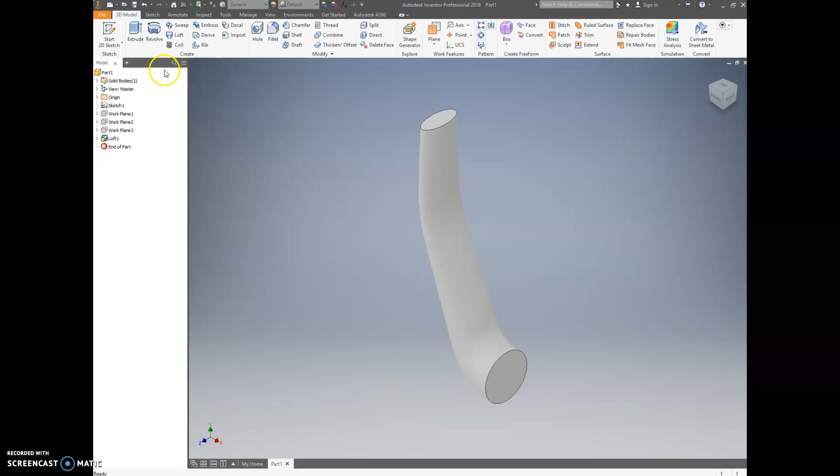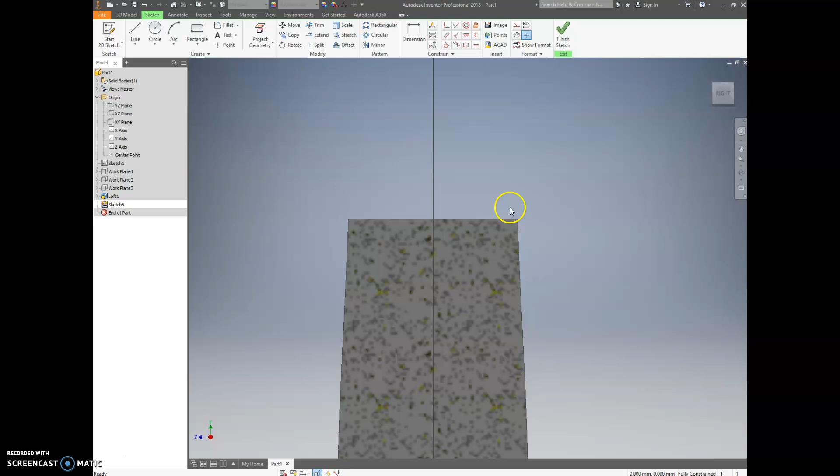I can place a sketch on the YZ plane. Let's slice graphics to remove the part of the loft that was blocking my view, so I can now see my sketch plane. Let's start by putting just a couple circles here, not too worried about their size because we'll constrain them to get them to fit.

The inside diameter is 10, and the outside diameter is 20.

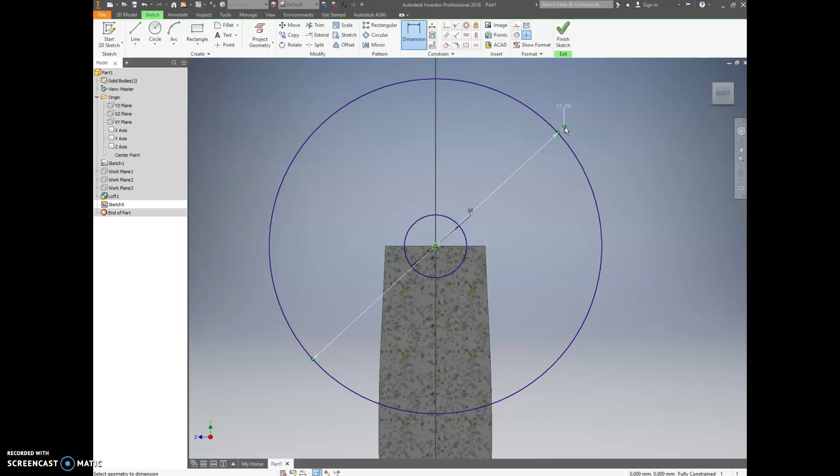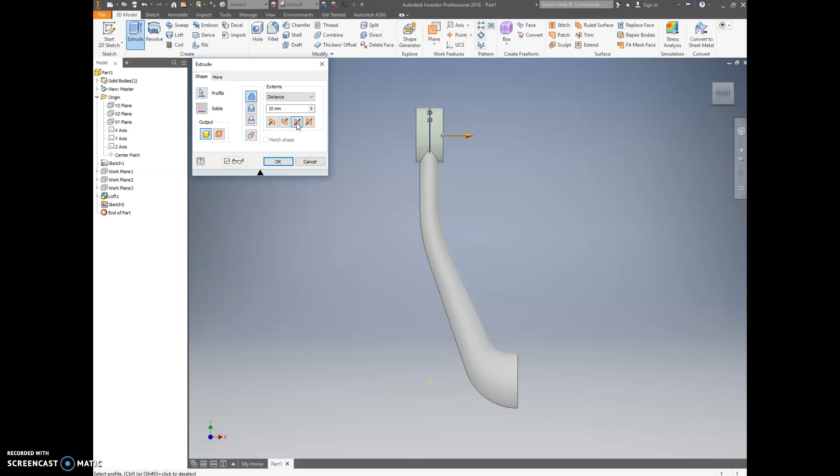I'll finish that sketch and do an extrusion. Select my profile. I don't want it to extrude all in just one direction though. I want it to go out in both directions equally. So I want a symmetric mid-plane extrusion, and the total width of that is 9 millimeters. So there's the round end.

So part of my lever handle is kind of where it shouldn't be. So I suppose I should probably get rid of that with another sketch I'll put right here.

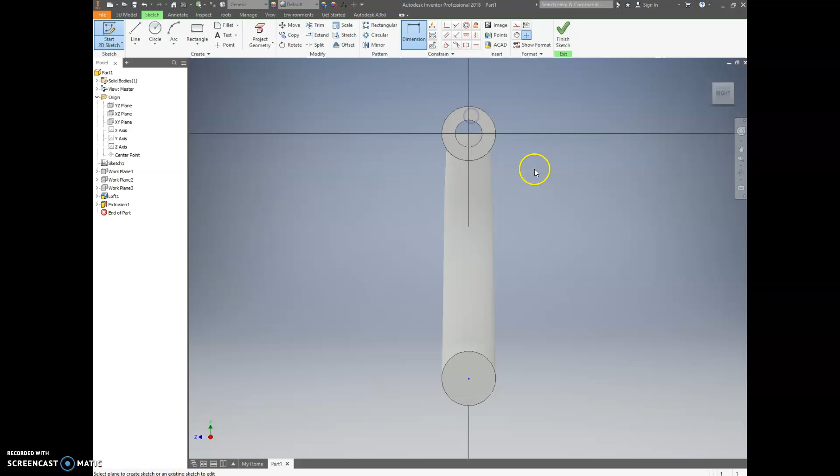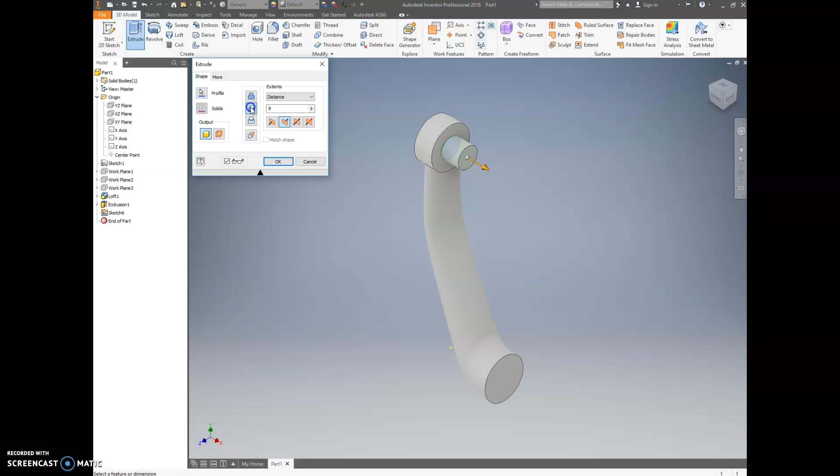All I need to do is project the geometry like that. Projected geometry is already fully constrained, so I don't need to do anything other than finishing the sketch, creating my extrusion, except I don't want to add new material. I want to cut away old material, and I want it to go all the way through the part. So I'll click that, and now that part of the loft has been removed from the center of that cylinder.

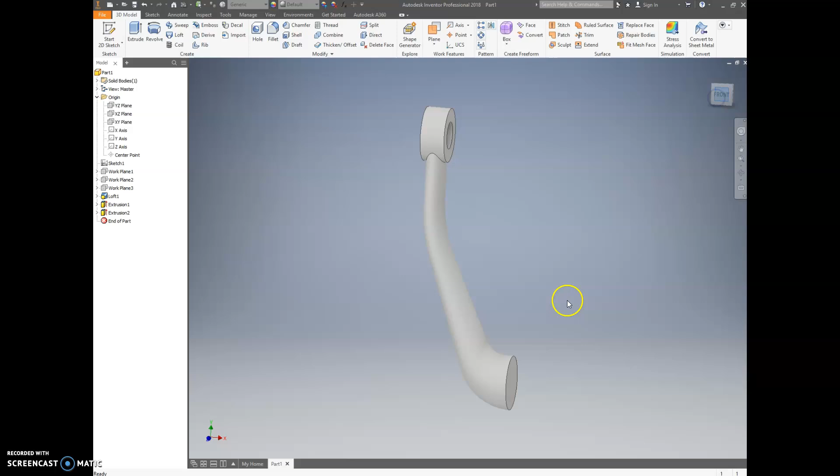Next, I'll add the cylinder down here, which could be done as a series of 4 extrusions, but I prefer to do it all in one step by doing a revolve.

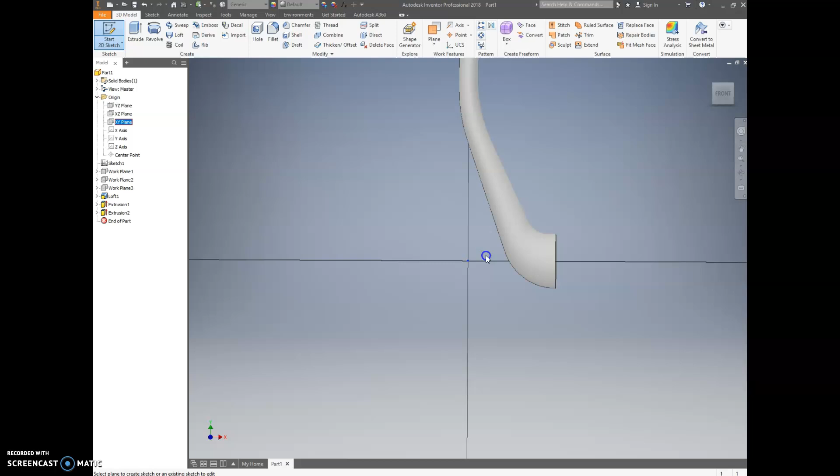So I will place my sketch, my 2D sketch, on the XY plane. Again, slice graphics, or you can hit the F7 key to slice these graphics. And I want to draw this part down here. All I have to do is draw the top half of it, and then I will revolve it.

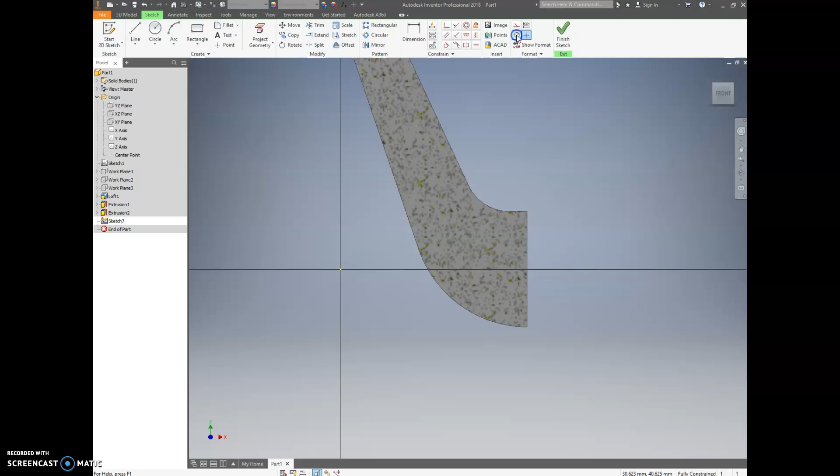So I'm going to change my line type to a center line and draw a line from the origin off to the right here, some arbitrary amount. Doesn't really matter. Turn that center line feature off to go back to drawing regular lines and start sketching.

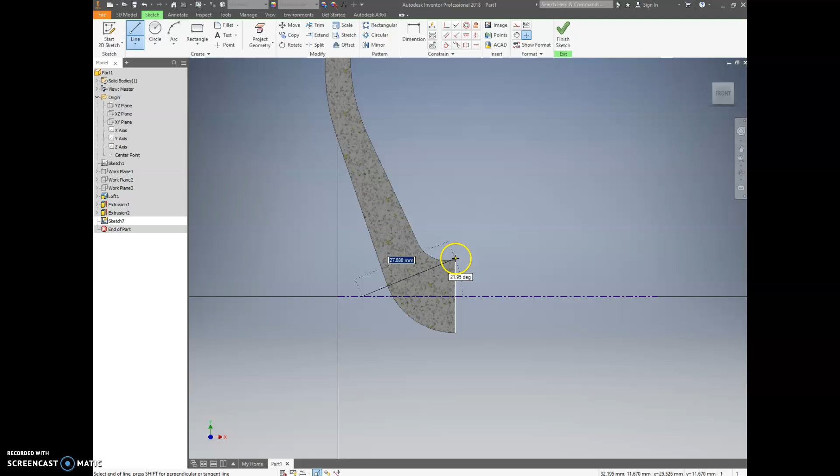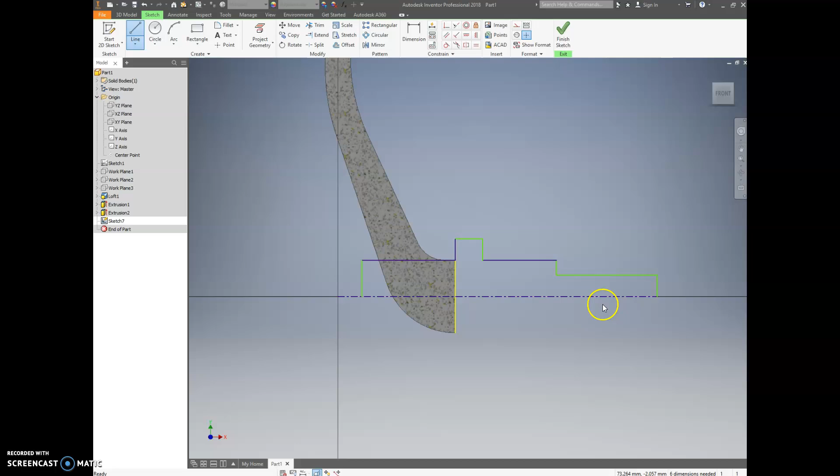Again, don't worry about the exact size of this stuff. Some of it we can, well, it's not going to let me infer that, so I'll just draw this over, up, over, down, over, down, over, down, like that. Not worried right now about the size. I'll come back and add these sizes.

I'll just start at the left and work my way over to the right. The cylinder over here has a diameter of 14. Because I used a center line here rather than just a regular line, when I put a dimension to that center line, it automatically gives me an inferred constraint there that I don't want.

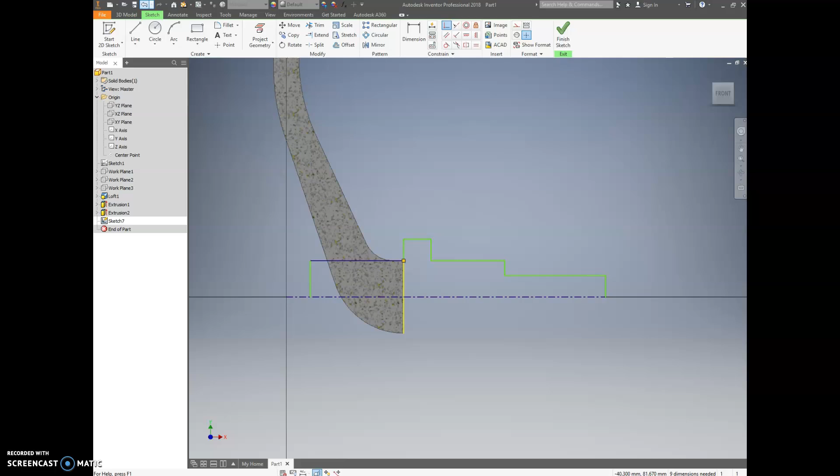Sometimes that happens, so I'll delete that line and draw it again, this time without inferring any constraints. Let's trim that off there and make coincident the end of this line, the end of that line. Nope, I moved it the wrong way. Might have to delete that line as well.

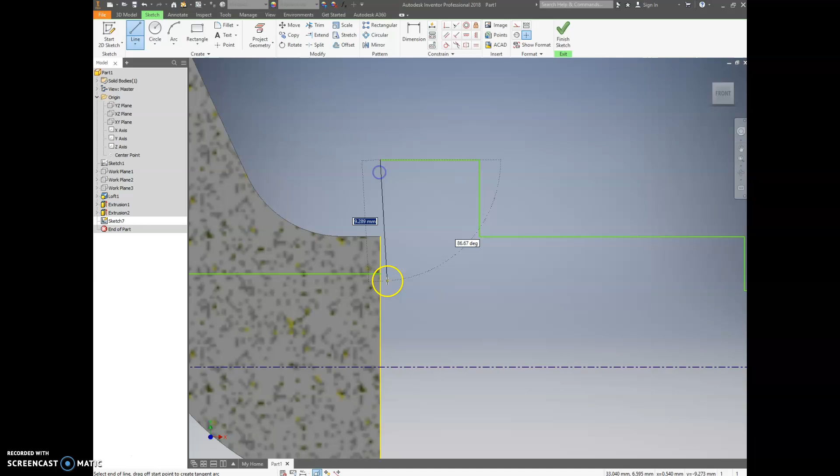So an inferred constraint is, like if I were to start drawing my line right here, that little dotted line that shows up as I place it is in line with this axis. If I click right now, Inventor is going to assume that I want that constrained to that line. Oftentimes inferred constraints are beneficial, but sometimes we accidentally include them when we don't really want to.

So now I can place a dimension here and change that to be 14, and that is what I want. So I've got a 14 millimeter diameter here, and then that transitions to a 28 millimeter diameter for this feature. I guess I'll just leave the dimension over here, 28. Then it steps back down to an 18 millimeter diameter.

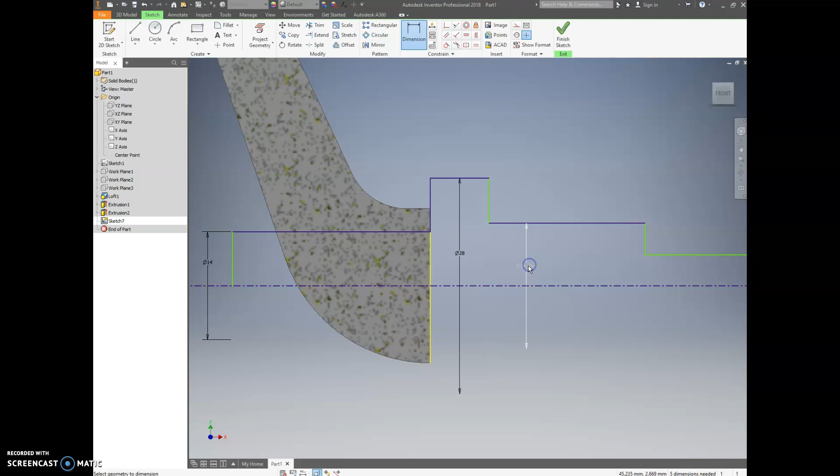And then finally the last step down is a 12 millimeter diameter. Okay, so I've got my diameters. Now we need to look at the lengths of these. From here to here it is 22. This feature has a width of 7. The next step down has a length of 28. And the last one, 24.

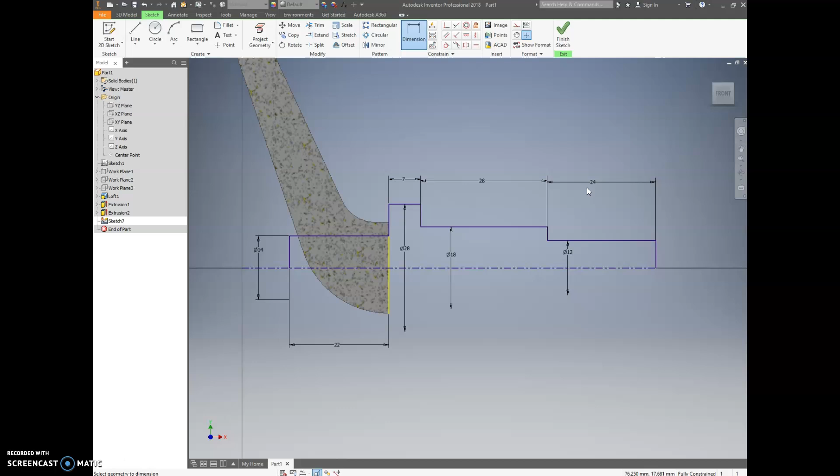Okay, so I've got a fully constrained sketch, which I can now use to make a revolve. So I will revolve. It automatically chooses the profile for me and the axis, and it's a full revolve. I just have to hit OK. So that lays down the basic shape of it.

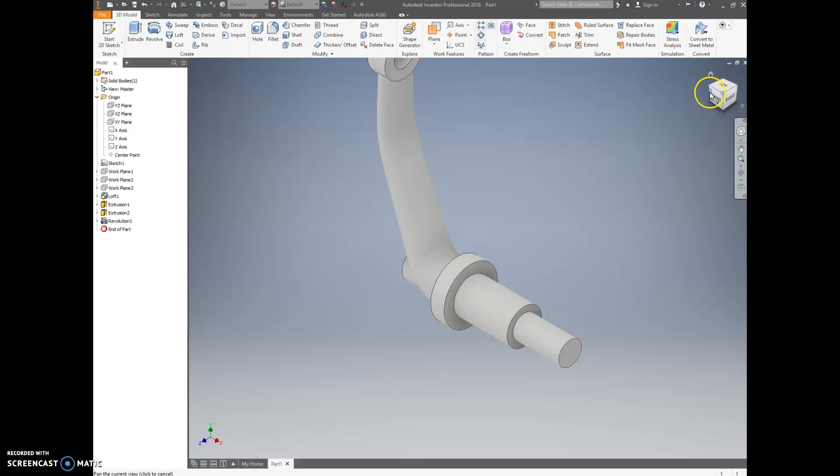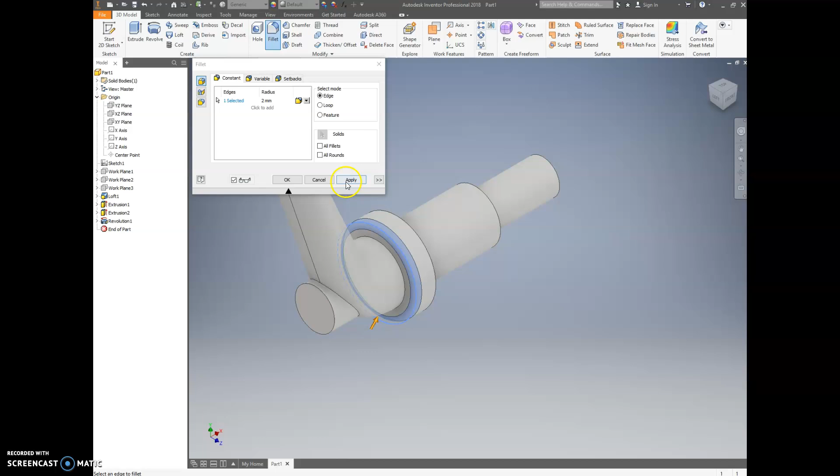Now, there is supposed to be a fillet on this side with a radius of 2, but I didn't need to create that in my sketch. I can make that as a 3D feature. I can select the 3D fillet command with a radius of 2, that happens to be the default. I just need to select the edge and apply it. Okay, so that rounds off that corner.

I also have a couple chamfers here, what size are those chamfers? It looks like they are 1 millimeter by 45 degrees. Let me show you what I'm looking at here. 1 by 45, 1 by 45. So those go on these two edges.

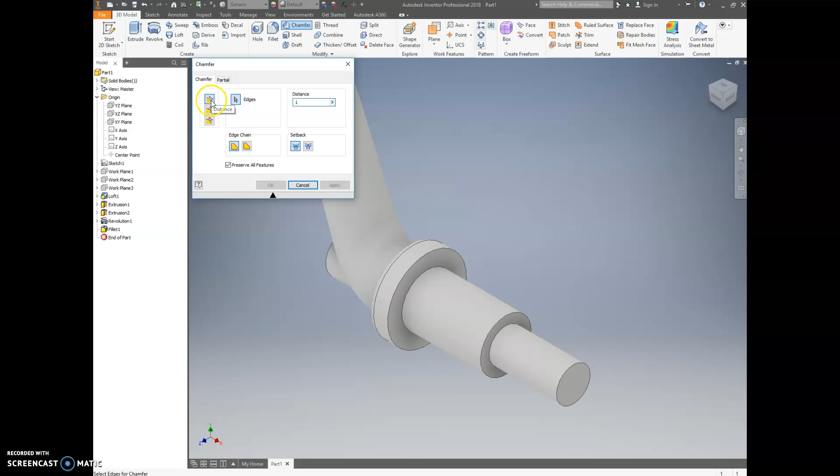So I'll select chamfer, just make it 1 millimeter. The first option here are equal legs, which translates into a 45-degree chamfer. I just need to choose my two edges and apply it. So now I've got the two chamfers.

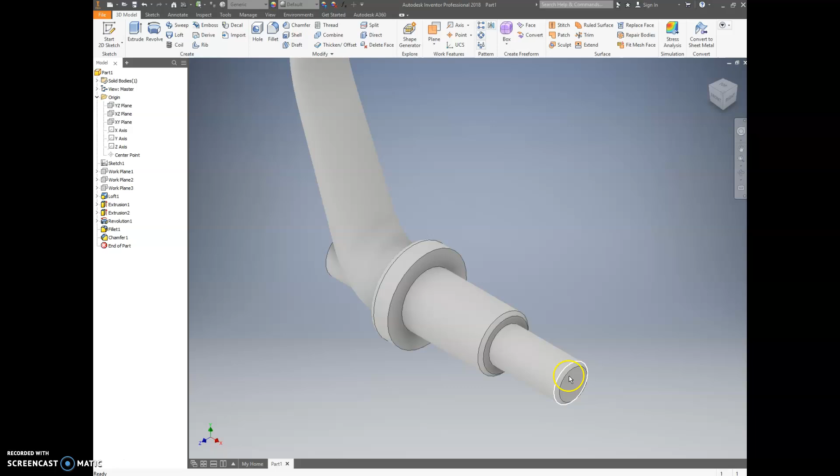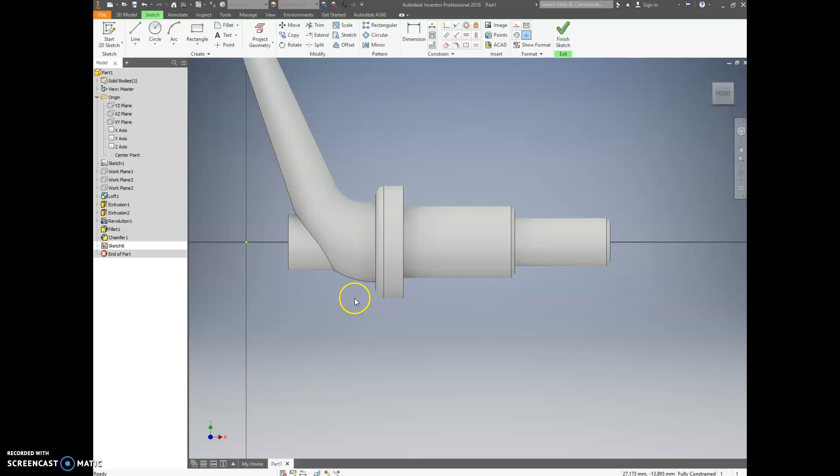There is a hole in the side of this that looks like it's a through hole. So since it goes all the way through, I can just place the sketch on the XY plane. Now, if this hole had any kind of special features like threads, a countersink, or a counterbore, I would want to place this as an actual hole. But since it's just a plain through hole, it's okay to just make it as a cut extruded circle.

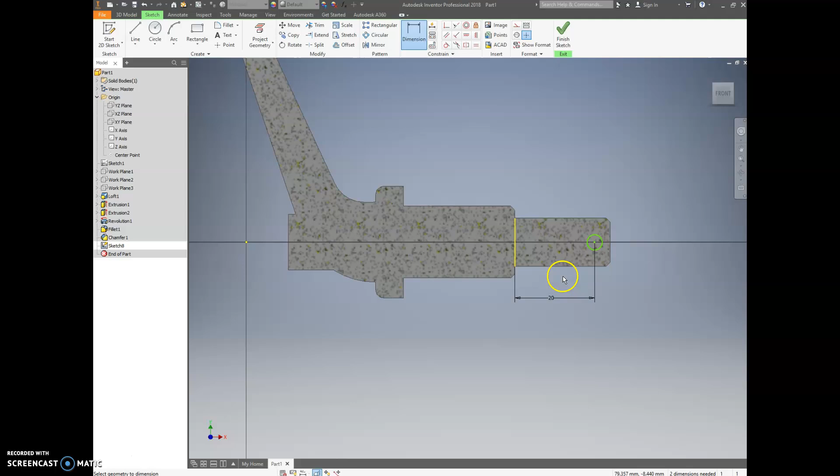The distance from this edge to the center of the hole is 20. And the diameter of the hole is 3. I can make a horizontal constraint between that point and the origin. That fully constrains it. Then I can do a cut extrude.

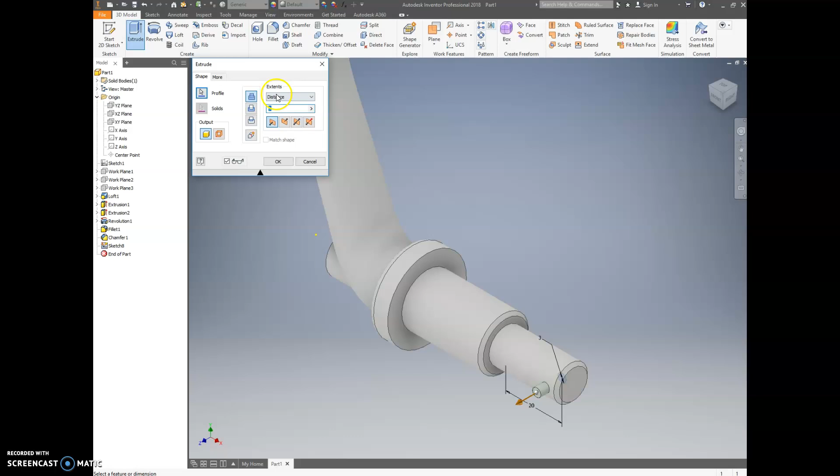Okay, it automatically chose my hole for me, but it's only making it cut extrude in one way. I want it to go both ways, and the distance is just all the way through. There we go, I've got that hole.

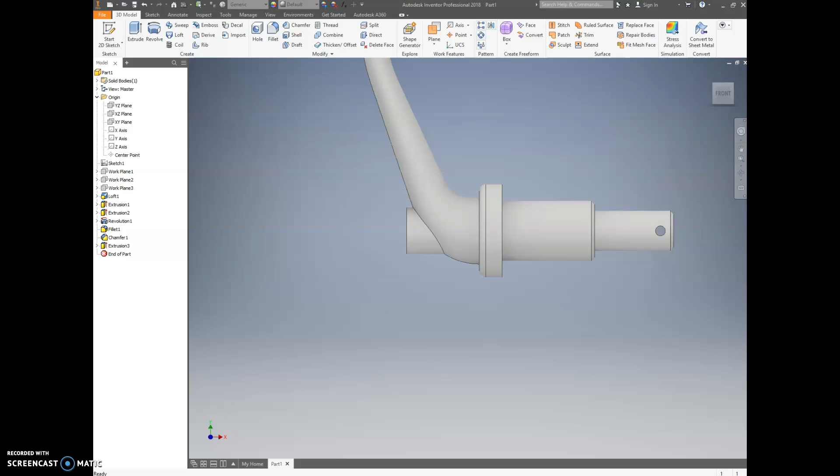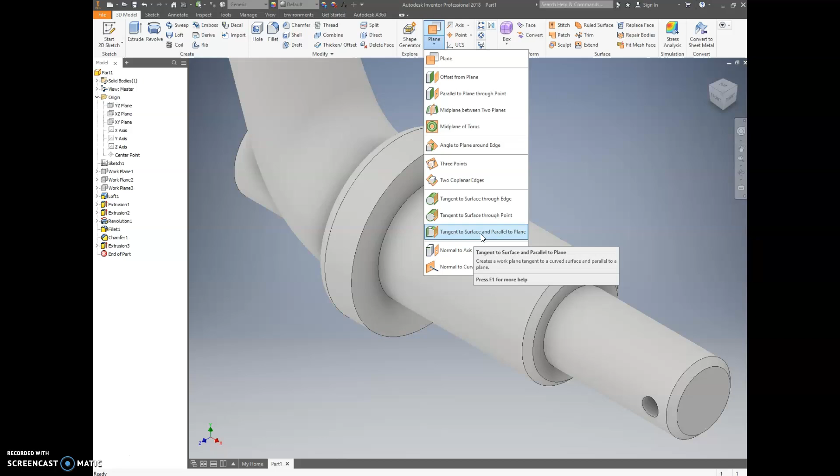And then finally I have this slotted hole that is not a through hole. It has a depth of 3.5 millimeters. So I want to place this sketch on the side of this cylinder, but since the cylinder is not a plane, it's curved, in order to place a sketch on that plane, I have to create a work plane. This time I'm going to go tangent to a surface and parallel to a plane. I'm going to be tangent to that surface and parallel to the XY plane.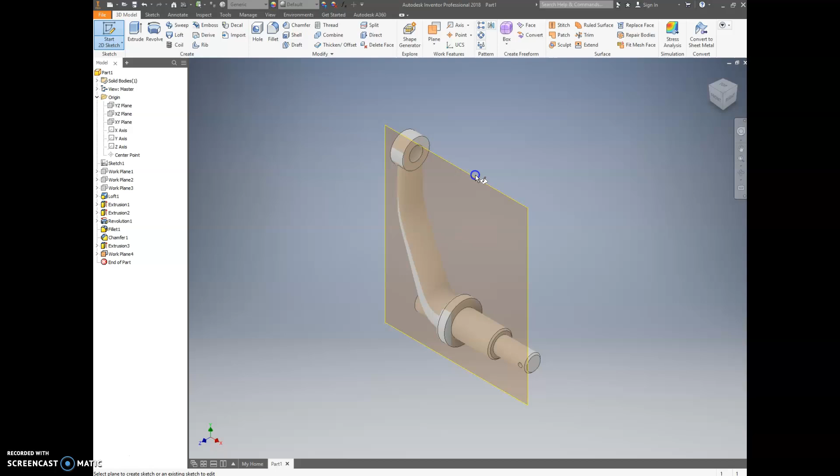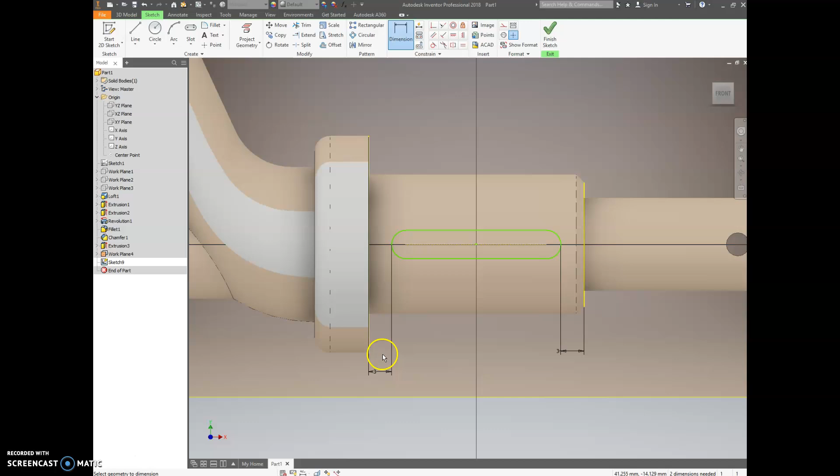So now I can draw the... I placed the work plane, I didn't place a sketch. Let's place a sketch on this plane. Now I can come in here and draw the slot. Okay, and the distance from the end of this cylinder to the edge of the slot is 3. And from here to there is also 3. And the width of the slot is 6.

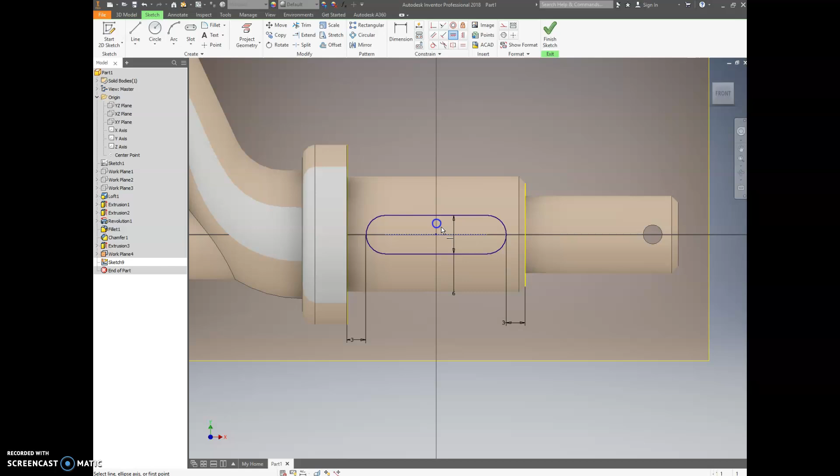Okay, that didn't quite fully constrain it, so let's try moving it. It moves up and down. So let's apply a horizontal constraint between the origin and the center of my slot. Now it's fully constrained. I'll finish the sketch and do a cut extrusion with a depth of 3.5 millimeters.

And again, I don't like seeing work planes, so let's make that invisible. And I think that's it. I think that covers everything. This is now a complete lever handle.

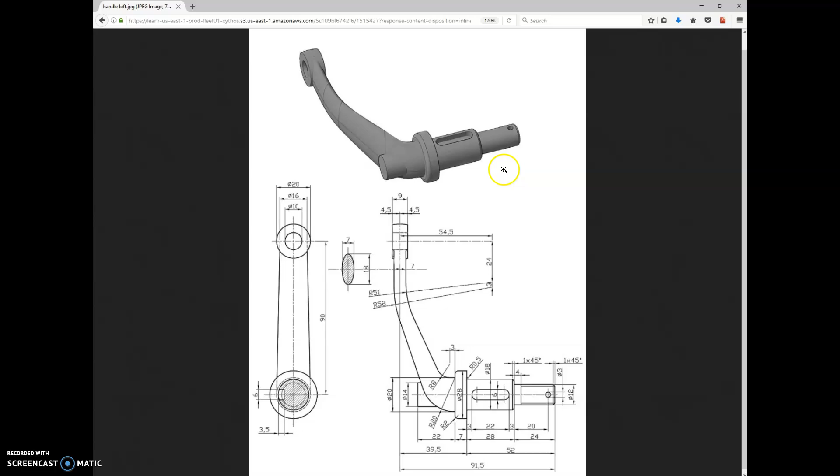Some people have been asking about these lines right here, and I believe they indicate the presence of threads. But the thread size is not specified in the drawing, so we could potentially add threads there, but I would just be guessing at what the size of those threads are, and I'd rather not do that. So since I don't know the size of them, I'm just going to omit them from this model, and you may as well.

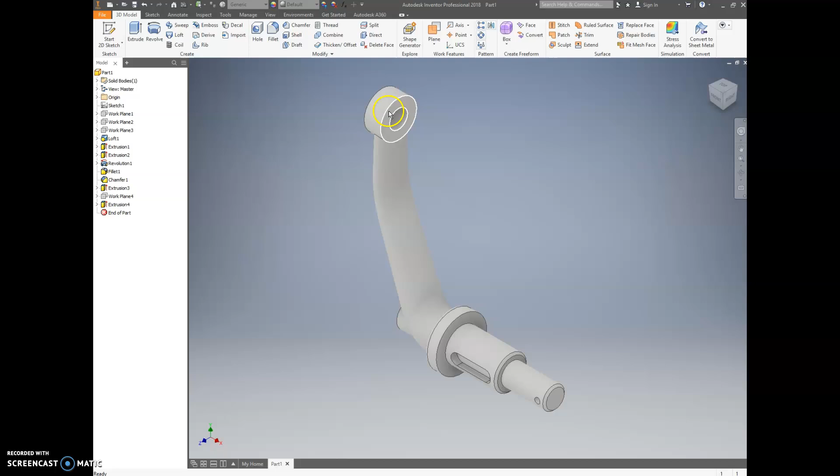So if you get the loft, the extrusion, the revolve, the through hole, and the slotted hole down here, the slotted blind hole, then also the chamfers and the fillet, that would be a complete part.

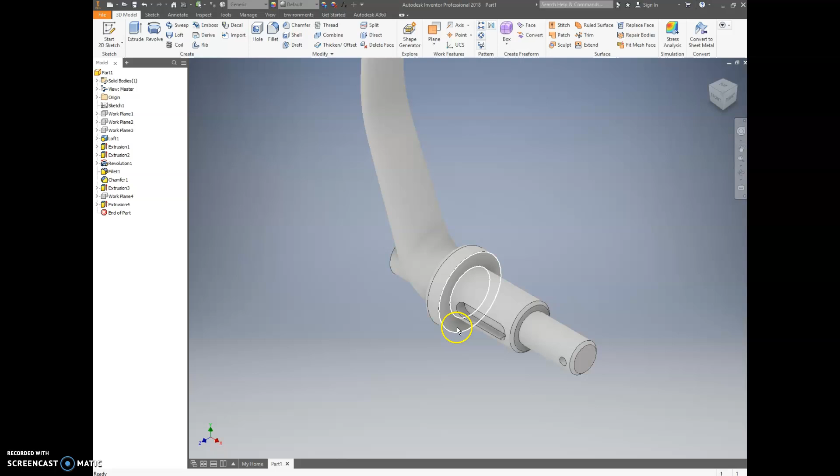So if you've made it this far, congratulations. As I said, this is probably the most technically challenging part we will make this semester. You should have mastered now all of the 3D modeling creation tools that will allow you to model just about anything.